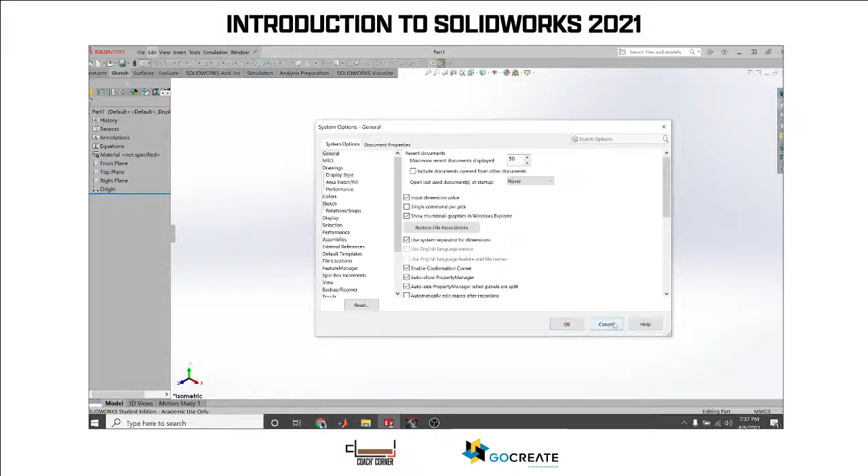Okay, so right off the bat, let's get acquainted with our layout. Yours might look a little different because I've got mine altered a little to use small icons and little bits of text - yours will probably use big icons. So if I go to Options, let's see, Display... yeah, I'm not going to mess with that. I'm not going to do any searching today.

All right, so right off the bat we have some things we need to become acquainted with. Along the top here, when you see the Features tab, Sketches, Surfaces - that is called the Command Manager. This whole area at the top is the Command Manager, and every time you switch from one thing to another, the options change. For example, on Features we still have our traditional Home, New, Open, Save, that kind of stuff, but in Features we have things like Extrudes, Revolve, Lofted and Extruded Cuts, Hole Wizards, things like that.

When we go to Sketch, we see we can create a new sketch, dimension the sketch, do lines, rectangles, slots, circles, arcs, and all kinds of stuff. If we go to Surfaces, the menu changes even more. So it's just important to be cognizant of what you're actually attempting to do, and relate what commands are in each one of these tabs.

The other thing is you can actually get rid of some of these tabs. Since we don't have any intention today of doing simulation, we can uncheck Simulation. We don't want to do any analysis either, so we'll right click on the tabs, go to Tabs, get rid of that. We can just kind of leave the rest alone - I like to leave Evaluate, and I like to leave SolidWorks Visualize because I typically go into that in other things.

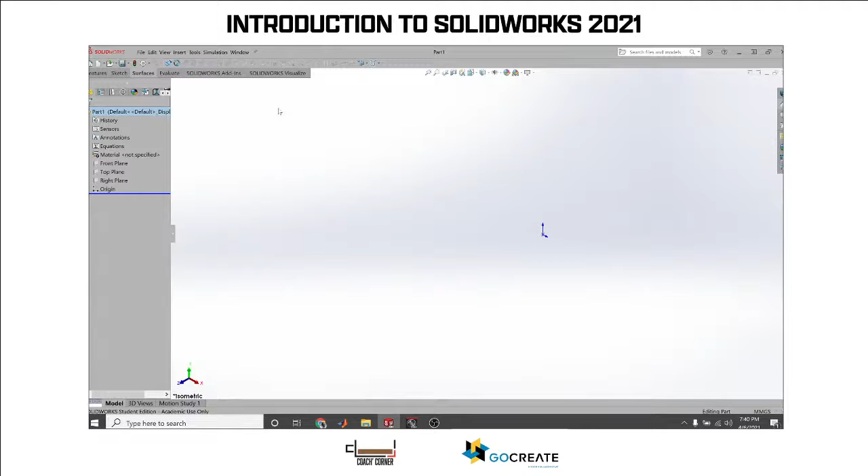And then on the left hand side, going down, we have this thing called a Feature Manager Design Tree. As I add features to this part, you'll see this blue bar will eventually move down and down, and I can start playing with some of the features. We have our Quick Access Toolbar, the Command Manager, the Features tab, the Evaluate tab - we'll go into that a little bit - and we'll talk about Sheet Metal later, plus breadcrumbs.

Okay, so let's go ahead and take this opportunity to jump off the figurative bridge and start with a sketch. The first thing I'm going to do is create a new sketch, and as soon as you hit New Sketch, you're automatically greeted with: hey, where do I need to do this sketch?

Where do we create such a sketch? It says right here: select a plane on which to create the sketch for the entity. With that command active, we can tell it we want it on the top plane, the right plane, or the front.

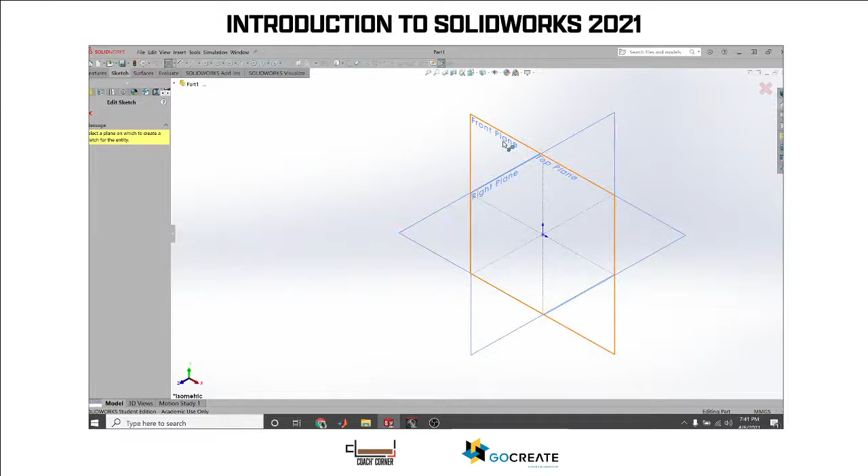If that's getting confusing, hold the center clicker wheel on your mouse and rotate around to manipulate the view. But for more concise control, you can expand this upper right hand corner, and you can see the front plane, the top plane, and the right plane. We can use that as our way to select, as well as just hovering over the plane.

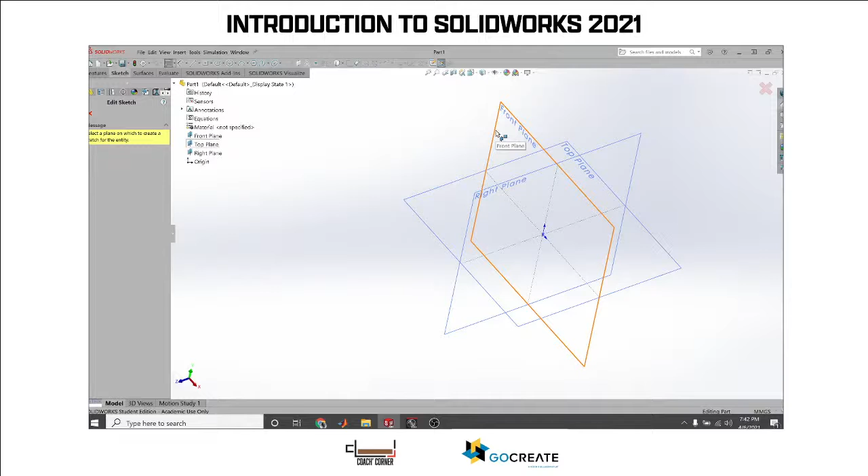So let's go ahead and pick the top plane. Now, this is basically the start of a sketch. There's nothing there, and we can start with primitive shapes and move forward.

If we hover over rectangle, we can draw a rectangle. Let's pick this origin point right here in the middle, click, drag out, and we can control some dimensions.

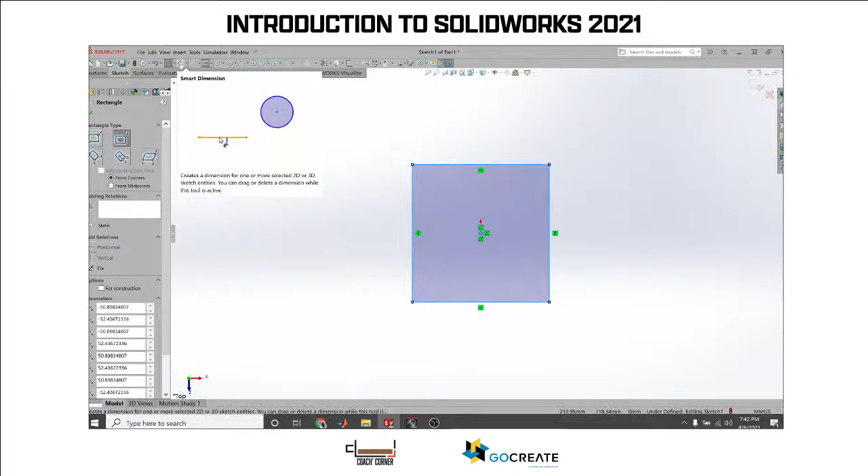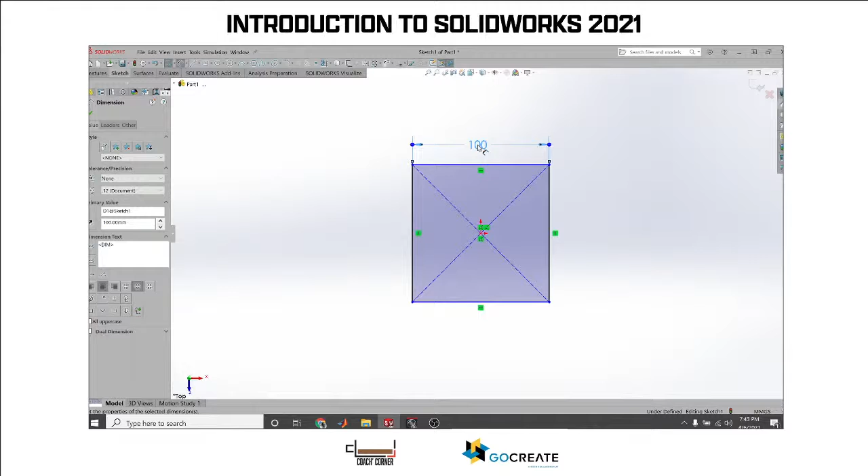If we want to do dimension, let's cancel that and grab our smart dimension tool. We'll click that, hover over this line until it turns orange, bring it up, and place the dimension by clicking again. Now it's highlighted this large number blue, so I can type in 100 and hit enter. That's 100 millimeters, because down here in the bottom right corner I've set it to millimeters.

Another fun thing we can do is click on this line, and we can do a couple things. We can hit 100, or we can type in something like 6, then put a space and IN for inches, and it automatically converts it to 152.4. Okay, let's go Control Z and undo that dimension.

The other way we can control this, if we wanted this to be a perfect square, is to add a constraint. We can click on this line, hold our shift key, and click on the second line. Now on the left hand side we have some properties: the selected entities of line 3 and 4, any existing relations, which there are none, and then we can add some of those relations or constraints here.

Obviously perpendicular is a constraint we can apply upon this. I don't think it's relevant right now, but because it's the most applicable thing, SolidWorks is going to automatically make it bold text. What I want to do is actually control how long that second line is based on the one I declared up above, the horizontal line.

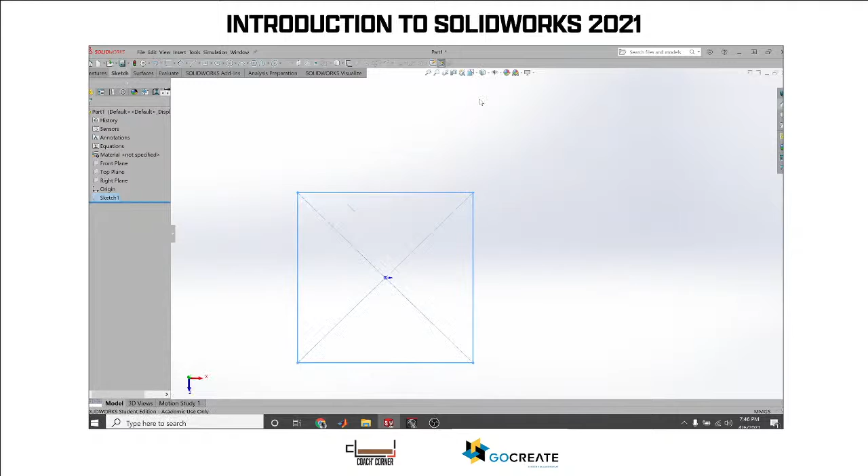Now let's play with our view orientation and the view heads up toolbar. We can click this drop down button, and you have a way to go to the front view, the left, or the right, selecting from any one of these as I highlight it. So I just click front. But what I'm going to do is go into this isometric view, or you can hold Control 7. Now we have this isometric view of our square.

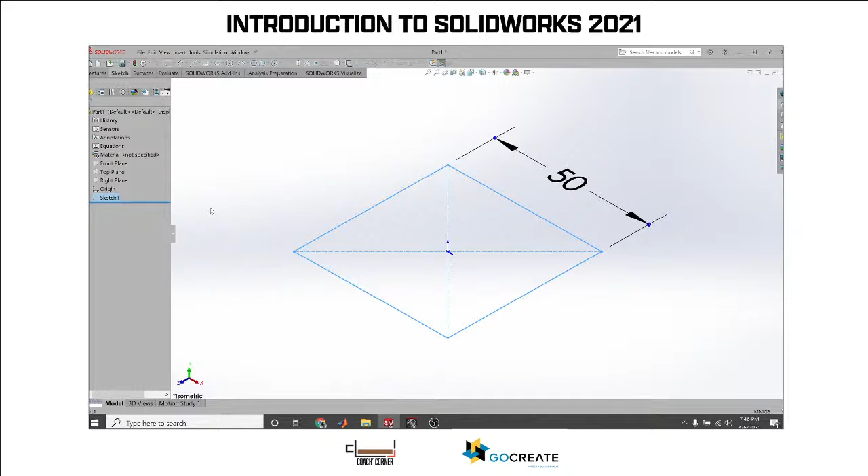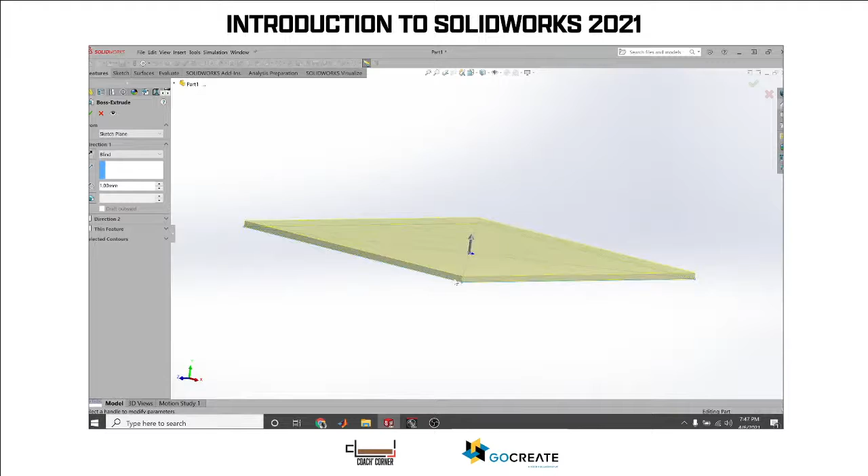With the sketch highlighted, we're going to go to features now, and we can do our first extruded boss. We'll click on this button, and you can see right off the bat that it's already added a little bit of thickness to this part for us. If we zoom in, you can see there's just this 1 millimeter thickness right off the bat.

But I don't necessarily want to do that. So there's a couple different things you can do here. You can drag and slide your extrusion if you want, or you can go the opposite way.

For now, I'm just going to come over to this highlighted area and type in 50 so I get a perfect cube. So we got our perfect cube there.

There are some instances when you're doing these extrusions, or making an extruded boss, where you might need to do a direction 2, like a second direction. When we get more advanced in our SolidWorks series and go further into detail, you'll see where this might apply.

But for now, I activated Direction 2. I've got blind selected, and I'll talk about that more in a second. I can say, hey, I want you to extrude upwards 50 millimeters, and then I want to extrude downwards, maybe 25 millimeters. It'll add 25 to the bottom of the part.

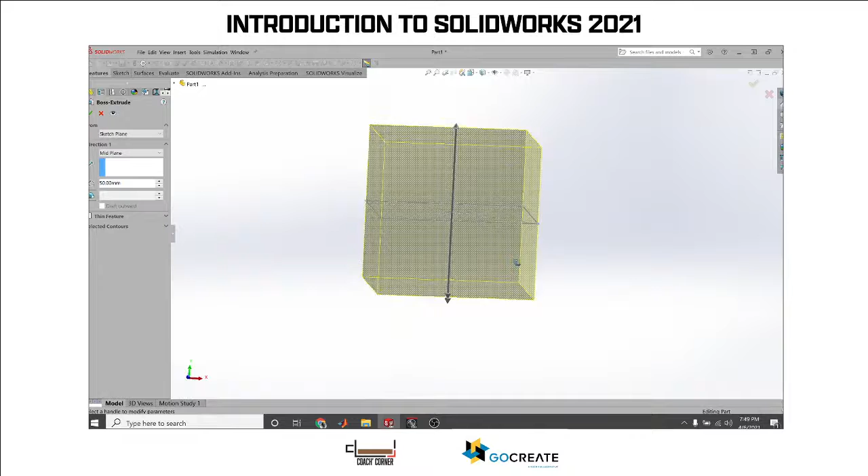For demonstration purposes, I'll go ahead and hit mid-plane, and it's going to take the 50 millimeters and divide that by 2, so it's 25 this way and 25 that way. And we still have our perfect cube. So let's switch back from mid to blind. It's back up top now.

You might run into a situation where you haven't declared the contour, for example. I'll just demonstrate now. I'll just hit extrude, grab this—see, it says sketch 1, contour 1. So sometimes you have to declare that. If we just clear selections, it's not wanting to do that for me. Yeah, that's what I want to extrude.

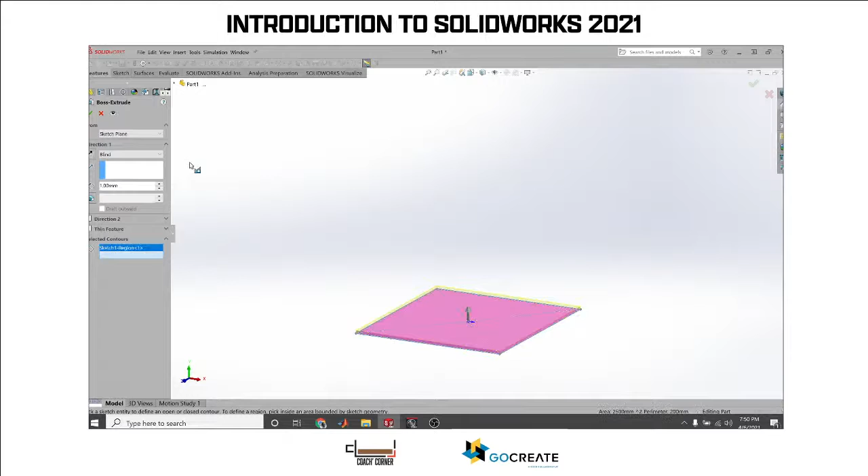Come back over here to 50 millimeters, hit OK. Then I can hit this check mark here and this green check mark here, and they both accomplish the same thing. So I'll go ahead and hit OK. And here we go, we have our first cube.

And nested within this boss extrude is the sketch that I used to create it, so there's a dependency here. This sketch, or I should say this feature, this boss extrude, is dependent upon this sketch.

Some people, especially ones that like to be super tidy with what they're doing, like to name the various features. So right now we have boss extrude 1, but we can come over here and name this feature cube. What is going on with my shift key? Cube. Okay, so you could do that.

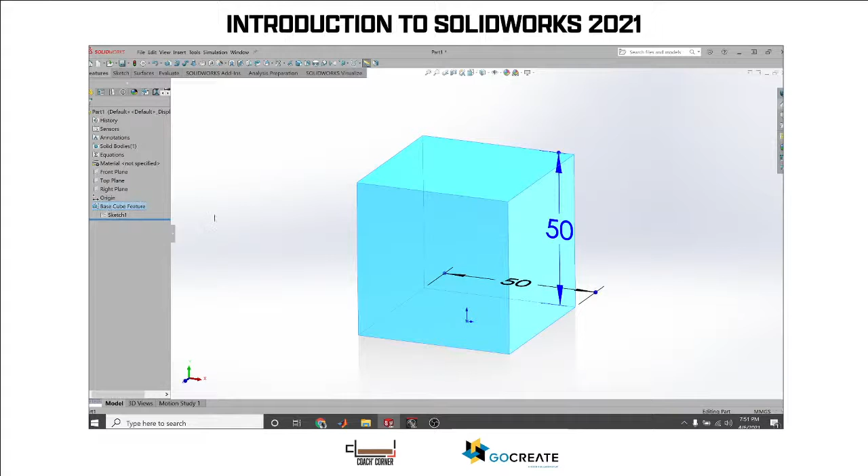Or you can be a little bit more descriptive and type base cube feature. Hit enter, and there we go. Let's turn off that instant 3D. Okay, and there's our sketch. All right, perfect. So let's just zoom and go Control-7 for the isometric view.

Now you'll notice I got this blue arrow sort of pointing around, and that's because our origins are showing, so we can get rid of some of this stuff. There we go. You can declutter your view, or you can clutter it up. You can add a bunch of stuff back in.

Let's see here, planes—we want to show height. There we go. So you just have that on nonstop all the time. But I don't really want to do that, so I'm going to turn that off in the heads-up display. Let's do Control-7, gets us back to isometric. We can play with our graphics.

If I turn off RealView Graphics, I can give some of that processing power back to the computer. Turn that back on, you'll get more of a realistic, shiny look, because it's tied to a material—I'll talk about that in a second. We turn on shadows, so now we can see the shadow being cast on the floor there. We can turn on ambient occlusion. We can turn on perspective, so now it gives us more of a realistic look at the cube.

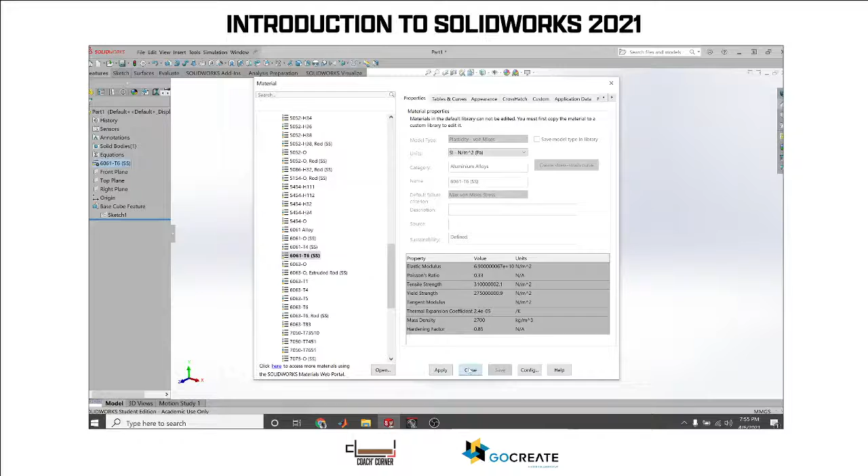So let's do ABS polycarbonate. Let's do a brass color. We can do copper. I'm going to go ahead and hit edit material, and I'm going to go to aluminum, and I want to specify 6061 T6. Hit apply, hit close, and again the view has changed.

Alright, so what then is the purpose of that? Why do we care other than, you know, like how it looks? I mean, looks are kind of important, if you're trying to get an idea for your part, like what it might look like.

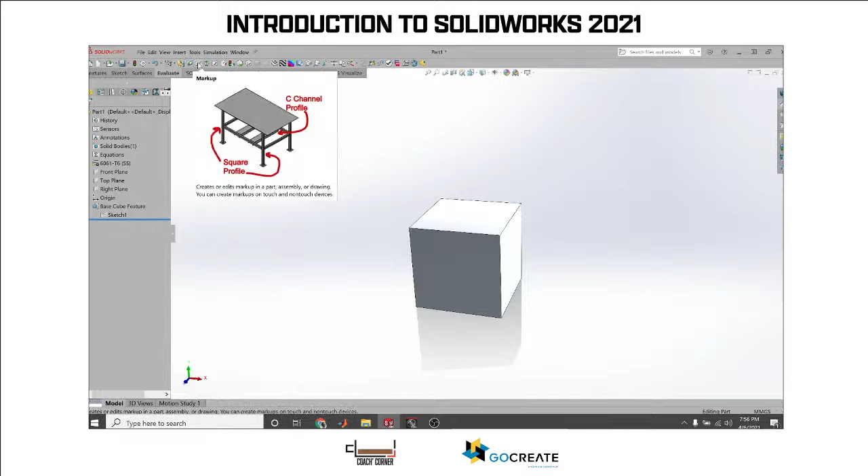But here's the thing: if this was a 50 millimeter by 50 millimeter by 50 millimeter cube of 6061 T6 aluminum, we could then estimate or come really close to how much this thing weighs by going to our evaluate tab. And in our evaluate tab, we have interference detection. We can do measure, markup, mass properties, sensor. We can do all kinds of things. So for now, I'll just show you a couple things.

This is our measuring tool, so we can come in and just verify, hold over this edge and it becomes orange. Click that, and there we go. Our distance, our total overall distance between this line and this line is 50 millimeters. So I'll drag that callout over there. And this line that we just selected there is 50 millimeters.

Expand this. You can see some callouts there. We're saying the distance is 50. The delta, or the change in X, is 50. The delta in Y is 0. The delta in Z is 0.

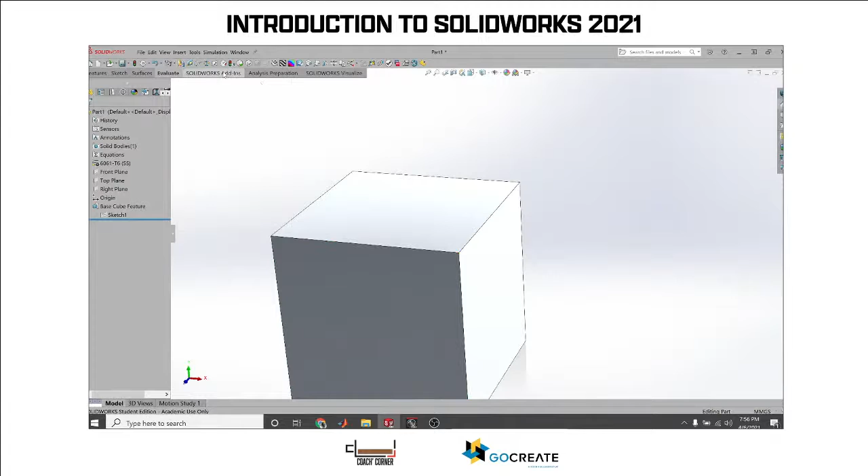Anywho, let's clear the selection. Let's close that out. How much does a 50 cubic millimeter of aluminum weigh? We can go to mass. And in this part here, we can see that our mass is going to be around 337.5 grams. But if you're like me and you're like, grams...

Or maybe you're into some other unit. So you can come over here and just say, I want my mass to be in milligrams. Maybe I want it to be in kilograms, or maybe I want it to be pounds. So I'm just going to hit okay. And you can see that it weighs just under 3/4 of a pound.

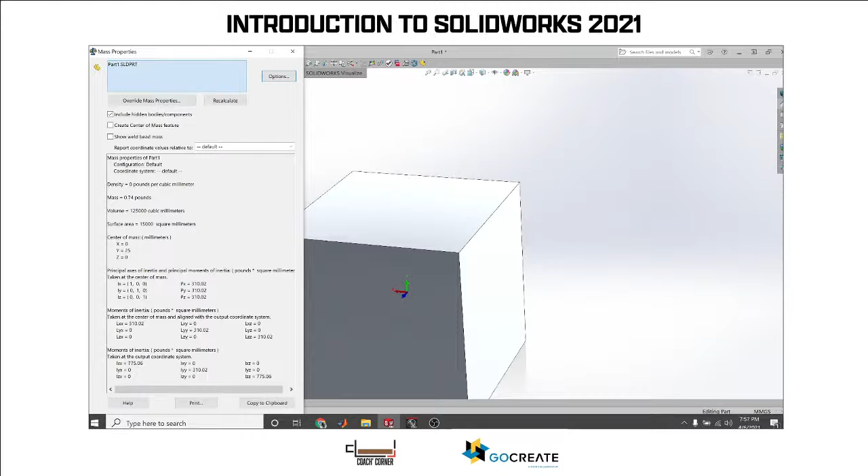So that's kind of the purpose of why you might want to declare your material a little bit more accurately, because then you can become a little bit more aware of how much that part weighs. If you're trying to do cost estimates, maybe you're going to call the yard and ask them, hey, I need this much aluminum. It's going to weigh 40 pounds. You can kind of come right off the bat and know how much that may or may not cost you.

When we talk about my other projects, the robots, it's really important to know how much things weigh. So just for funsies, let's go ahead and open up this robot.

Okay, I'm going to hit Control 7 to get this isometric view going on now. So you got to understand that this bottom plate and this second plate, they are made out of aluminum, and they're 1/2 inch thick. And then this top plate up here is also made out of aluminum. It's a 1/4 inch thick, and then all of these weird looking rails, those are all aluminum.

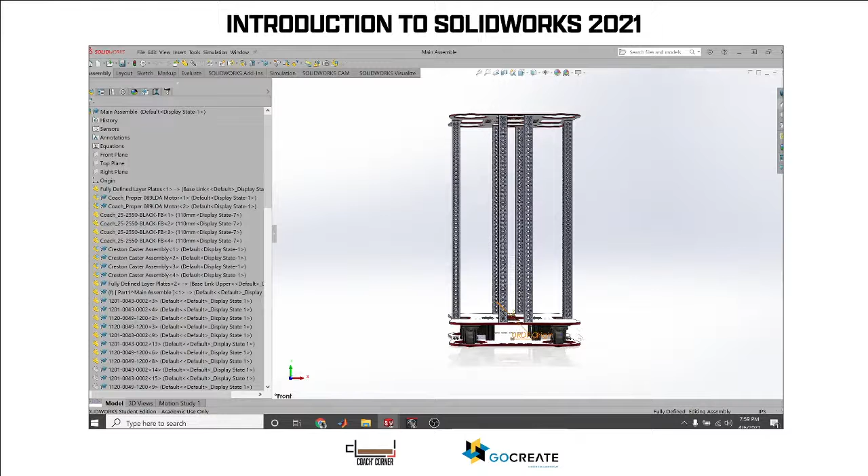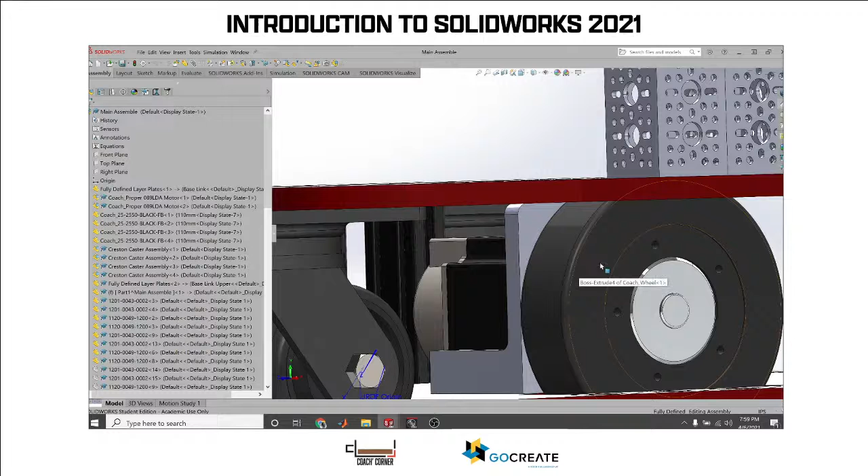I have aluminum here. I have some really heavy duty casters here. I have some motors and such down there. I have the motor mounts. And so by properly modeling all of these various parts and declaring their properties as close as I can, like right here I have rubber, but not all of this wheel is 100% rubber. I actually have some metal in there right on this ring.

So by being as close as I can, I come over to evaluate, and I can say, how much does this robot weigh? So go over to... it doesn't have a valid density.

So generally speaking, this robot's going to weigh 121 pounds. That's important stuff to know, because that drives how much weight I'm adding by adding battery packs and management systems and so on. How much do I need to worry about the inertia and all these other sciencey numbers that you'd need to know for doing roboticist work.

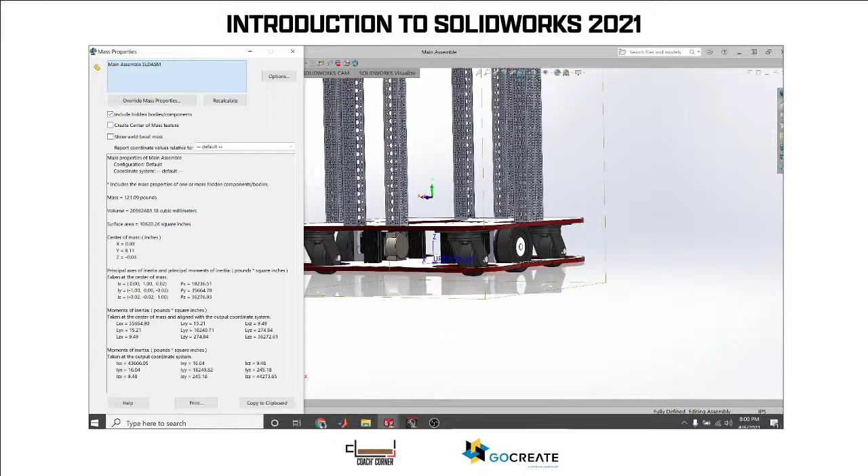You can also look at the center of mass. In the Y direction, it's around 8 inches from the floor. It's a little bit front heavy, and it's perfectly balanced on the X axis. So these are all things that are super important to people building robots.

Anyway, enough of that, I'm not going to bore you with building robots now. We covered sketches, we created a sketch, that's our sketch there. We did an extrude in our features commands, and there are all these other ones. So let's start playing with some more of these features.

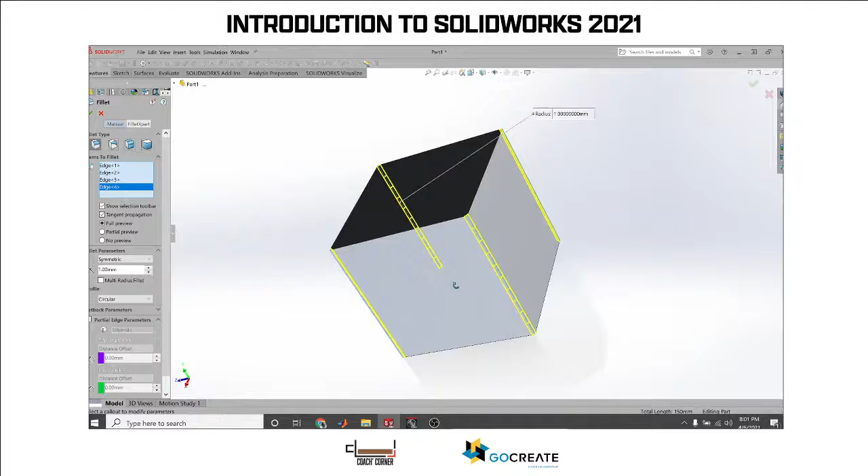For now, let's do fillet. Say we want to smooth out all of the corners or some of these edges here. We can click on the lines we want to fillet. I'm going to rotate over, and we can zoom in and see that it's going to create a 1 millimeter fillet.

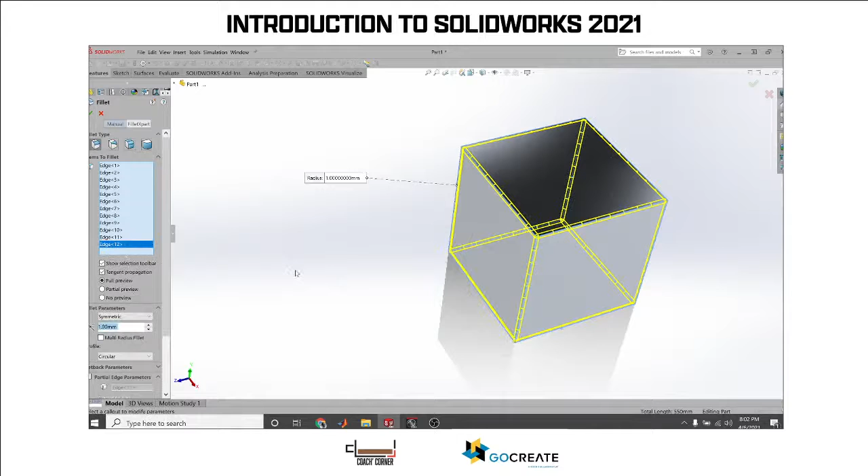Maybe we want this smooth on all the edges, so we're going to select. You'll notice when I hover over this corner that is unseen, it turns orange, so we can select that as well, and that one, and that one, and this one. Let's delete that, I don't want to select the face, I want to select an edge. And we'll hit OK.

Now we have really smooth edges. Maybe this could end up being a really weirdly shaped or sized dice. So, Control 7, we'll go back to our isometric view.

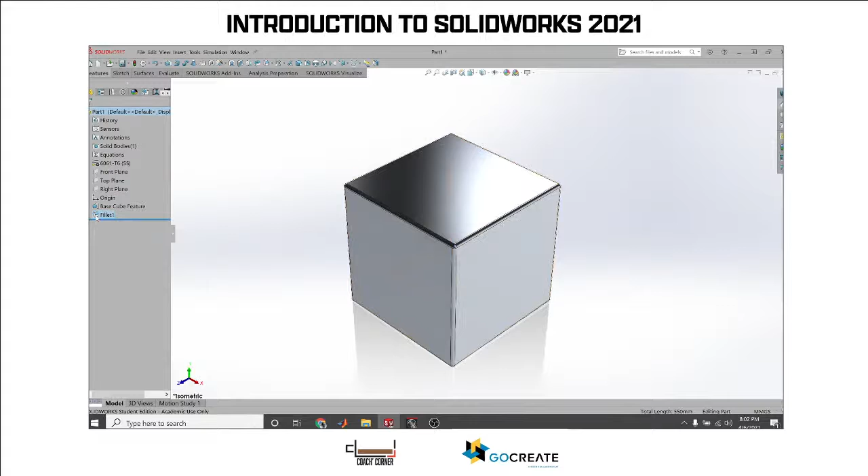I'm going to add another feature so we can play around with rolling back on the history, this feature thing. So let's do this. We have two features, a fillet and a base cube feature. Let's do another sketch, and we're going to create it on this face. Okay, notice how whenever I create the sketch, it automatically zooms to the face.

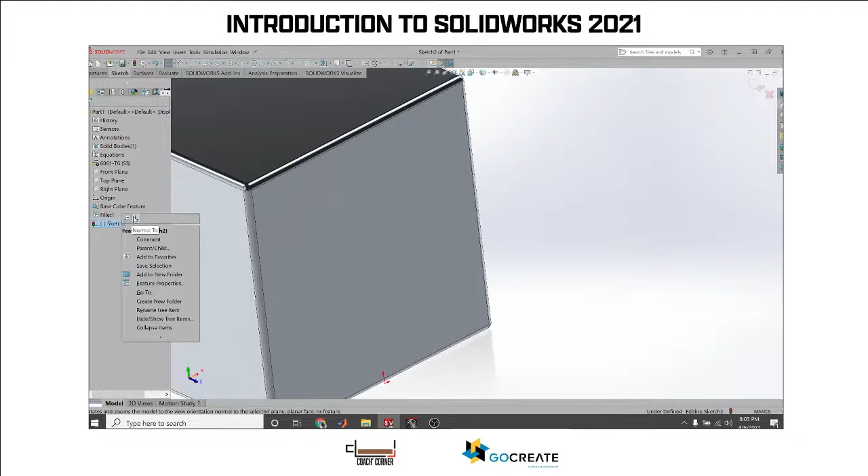You can mess with that by just twisting your camera and playing around. But if you wanted to get back to that, you can do something called getting normal to. So on this sketch, I'm going to right click, and there's this little arrow pointing up. I'll say normal to, and it gets me back facing the sketch correctly.

So what I want to do now is punch a hole through this square. But in order to do that, I really want to find out where the exact center of this square would be. So let's try using a center line. As I hover over this inference of the existing geometry, I get a little marker that pops up saying this is the center of this physical property. So I can click that. As I do that, these yellow lines pop up, and these are inference lines.

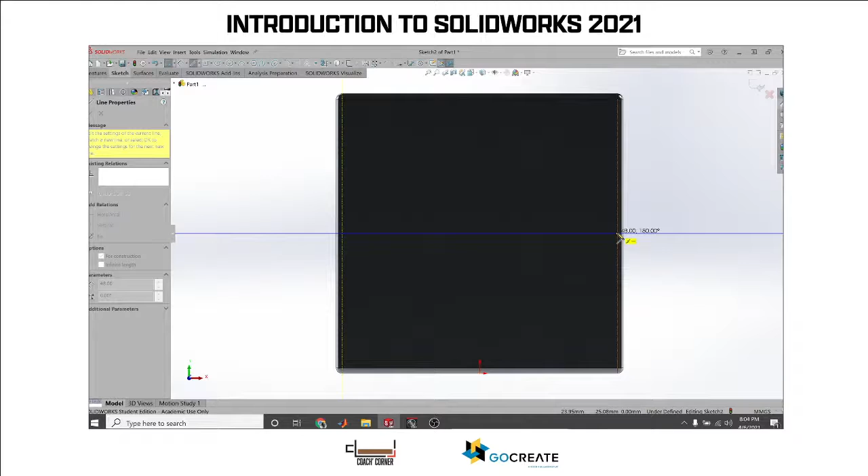These ones infer that it's straight up and down, or vertical. These ones infer that it is horizontal. So I'm going to hold it horizontal, let it snap all the way across, and hover until it hits this part of the fillet feature from the previous feature, then click, right click, and hit end chain.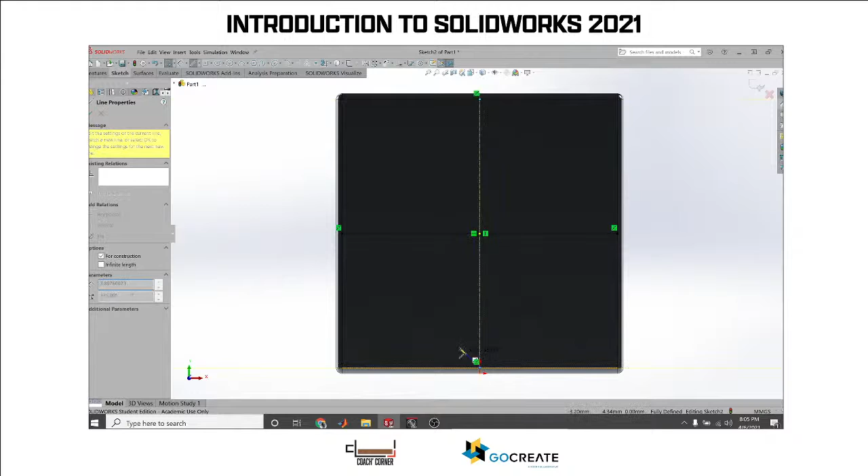I want to do that one more time, so I'm going to come over here, find the pop-up inference that this is center, and again we get our yellow inference lines, so we come all the way down and click, right click, end chain. So now I have these dashed lines that are going to help me place my hole.

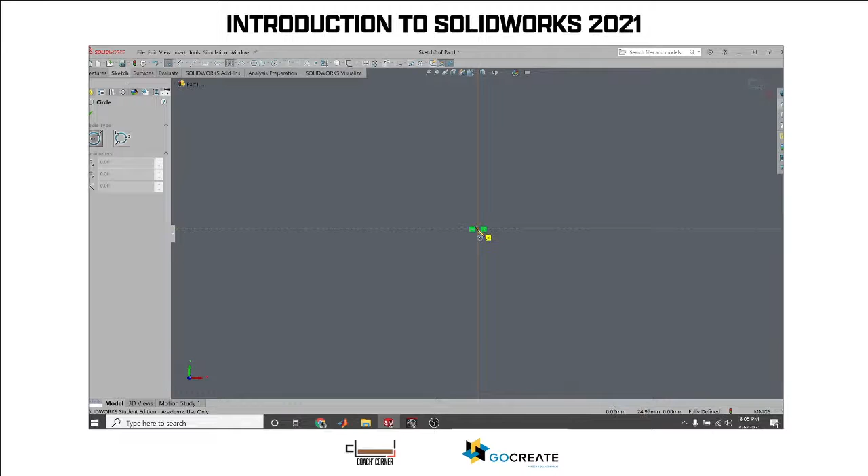So let's take a circle now, and let's place the center of the circle right here on this dot or point. We'll hit that. I'm not trying to put too many isms on you, but when I'm drawing circles or anything, I try to keep the inference, I don't like to just do some random 45 degree this way or that way.

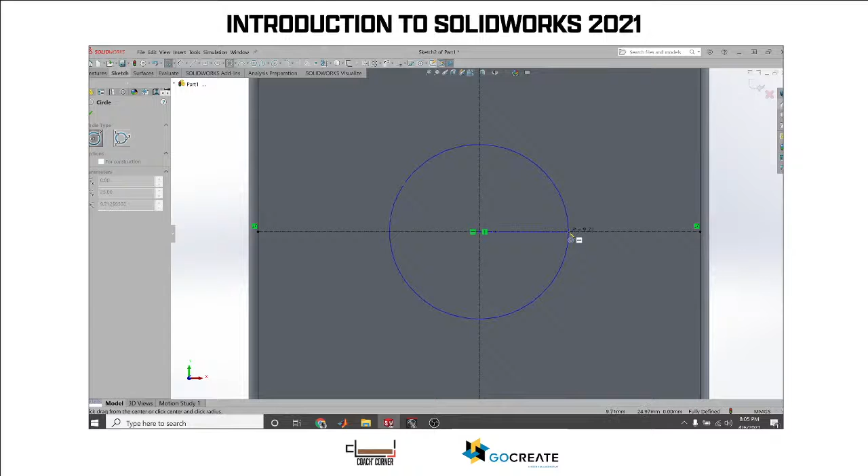I like to keep this drawn out and constrained to something, so I'm just going to hold it to vertical or horizontal. All right, so now we have the radius of our circle at 14 millimeters, and obviously radius is not quite diameter—it's half of that.

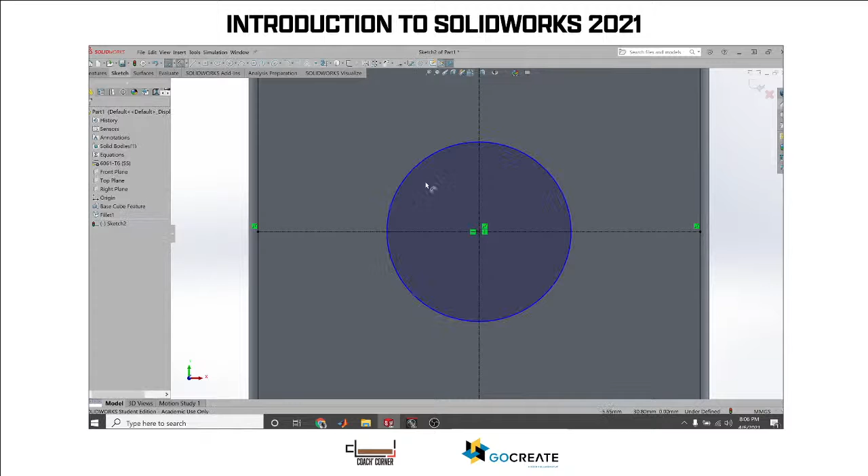So we can just type in 20... well, actually I want it to be 10. Okay, so then with that logic, if I hit OK and come over here to this circle, you can see now that I have a diameter of 20.

When you're placing your dimensions, I'm not trying to put too many isms on you, but I like to call it out in some kind of sensible way. Because this is such a small circle, doing this looks a little cramped, so doing this doesn't look as cramped. But I'm actually going to place it here for now because what I want to do is change it to 25 millimeters, and now it doesn't look as cramped. Alright, so let's go ahead and hit OK.

Awesome. Now, with the sketch still active, what I'm actually going to do is control 7. Let's go ahead and create another feature using this sketch by going to the Features command and then to this Extruded Cut.

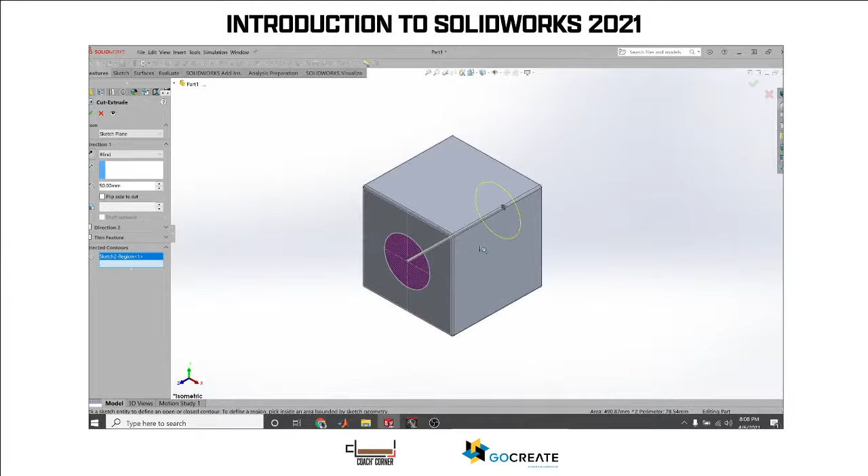And we have this selected here. So if we look at our selected contours, we can clear the selection and hover over it and click again. You can see it seems like it's automatically going 50 millimeters, or all the way to this face—but is that even correct? Because I'm just able to blindly drag this.

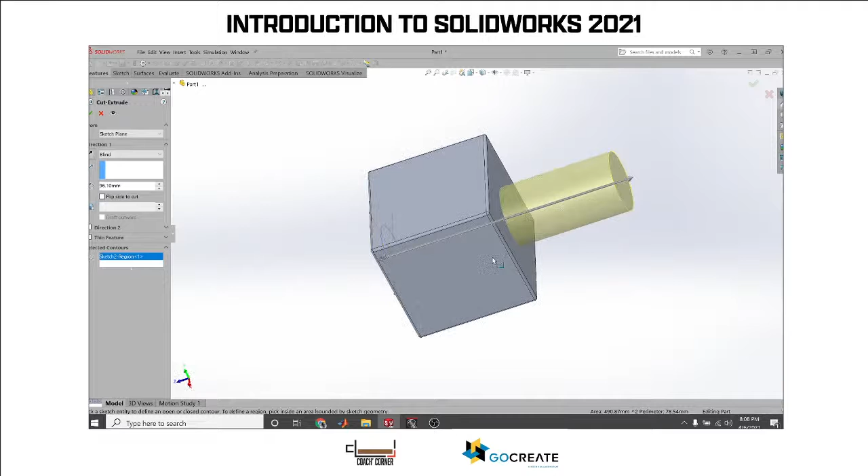So I can just say, well, I want it to be right about there, or I want it to be just somewhere way out here. And what this would do, I think, is create a hole here and then add material back here. So this is kind of not really super controlled.

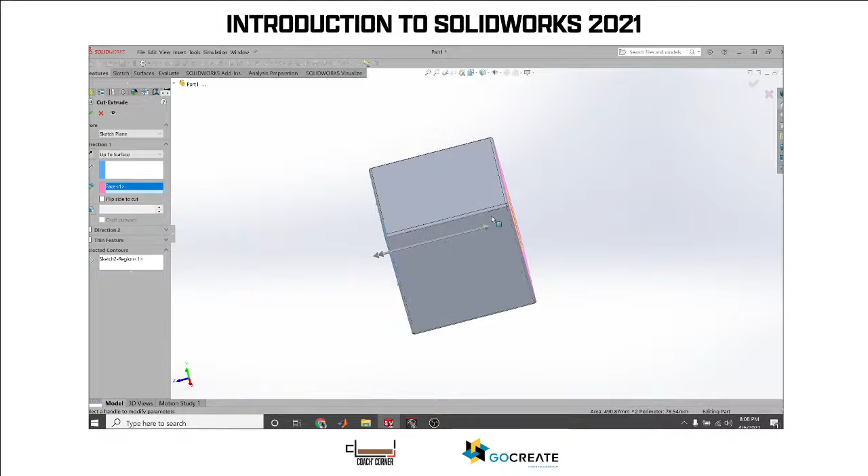So if we go back to this Direction 1 dropdown, we can tell it, hey, I actually want you to go up to this surface, and you'll see this new box asking which surface you want me to go to. So I'm going to click on this back surface, and it'll bring it all the way up to that face, and it will be controlled.

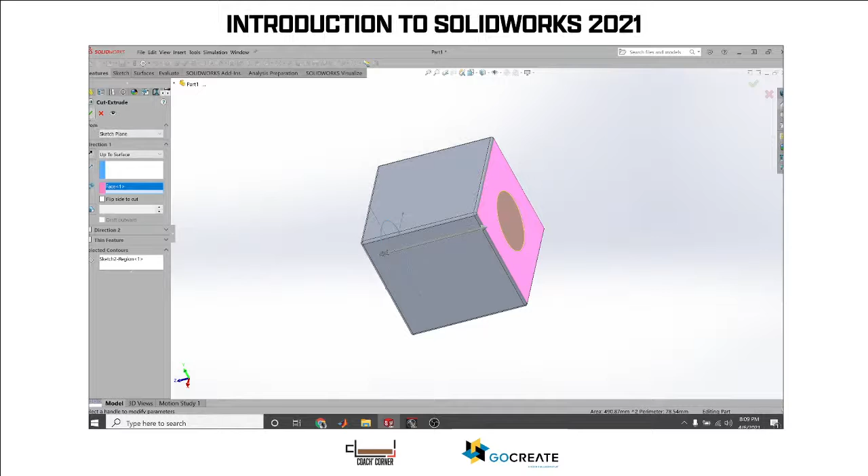So if I change the shape of the box, if the box got longer, then this hole feature would basically carry on—it would propagate to the new position of the face. So for now, I'm just going to click OK, and we have a hole.

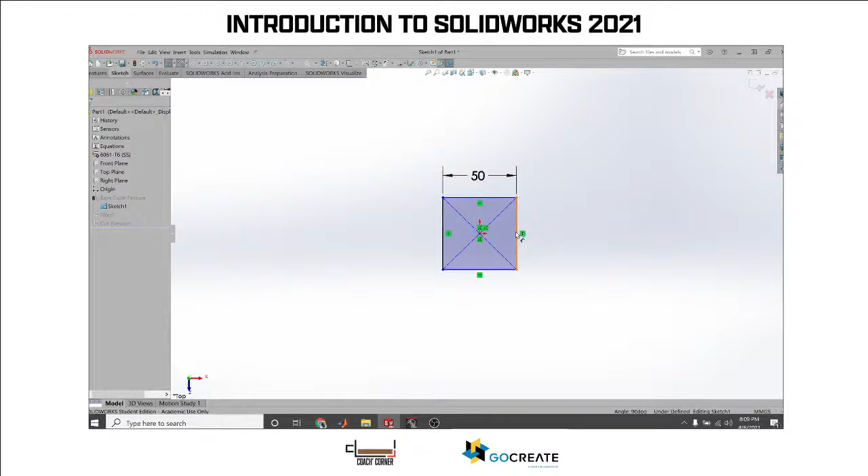All right, and so for funsies, let's go back to this base cube feature and edit the sketch. This time what I'm going to do is click this one and this one, get rid of this equal length, add a dimension to this one, and say 75. Hit OK.

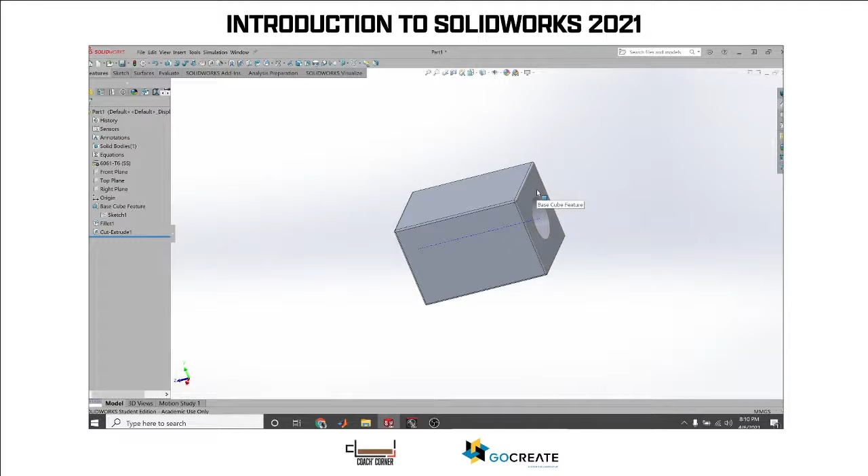Save our sketch, and then look—what's happened there is that because we defined that this extruded cut should begin here and end at this face, when this face moves, so does that particular portion of that feature.

Okay, so now if I want to play with my features, I was basically doing this because I wanted to get to this particular point where you can roll back using this blue bar. You can roll back your features. So I want to be like, well, I don't really want to have a hole there—so what does it look like without a hole? Cool. No, I want to put the hole back in.

So you can roll back your history, roll it forward, roll it back, and see what effect that might have. You can even go back and say, I don't want to fill it. I want to go—no, I want to fill it. Okay, and we can roll all the way forward.

Another thing we can do, instead of rolling back, is suppress a feature. So I've got this Cut-Extrude 1—I'm just going to change the name of this. I'm going to put 'hole.'

Okay, so let's do that. So I've got my hole called out.

Let's go ahead and suppress this. We can just right click on that, and there's this little arrow pointing down that goes from a solid blue to a clear see-through thing. We click that and it'll suppress that feature. But the feature's still there, it still exists, it's just suppressed. If we were to 3D print this, the feature's still there, but it would not actually 3D print that way. So we can go to unsuppress by right-clicking and hitting unsuppress.

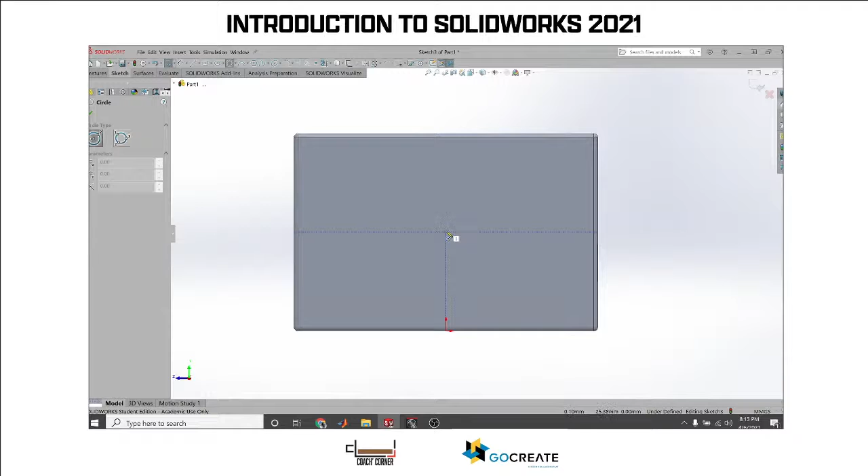To really drive this point home, I'm going to go to sketch and create a new sketch. I'm going to click on this face here, and for the sake of brevity, grab a center point circle and find the center point of this line, roughly right there. I'll come out and hit OK, and do a diameter of 25 divided by 2. Alright, hit OK.

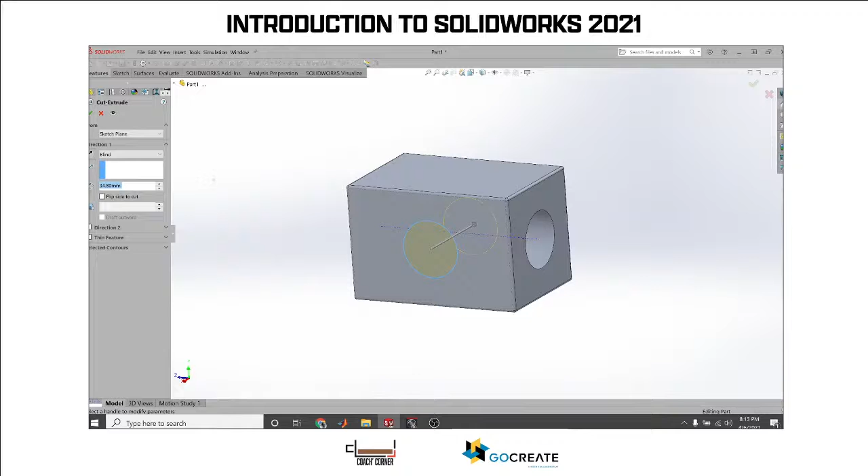And then I want to do a feature extruded cut. I'm going to say it's that cut, and be very specific and tell it to go to that surface. Hit OK. So now I've got this four-way block.

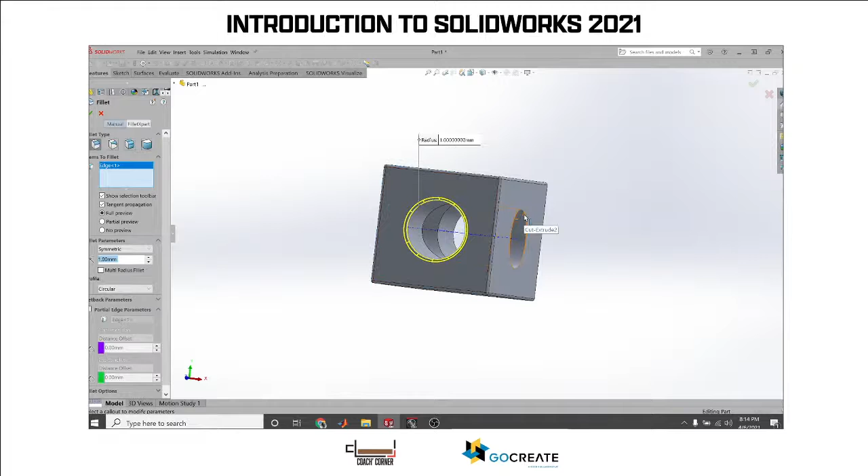Almost looks like a manifold for our go-kart. I'm going to make this a little bit more interesting and just add some fillets, so it's not that sharp edge there. Let's make it 1 millimeter and hit OK.

Cool, so I've got this part, but maybe on my go-kart this is like a chassis mount or something. Maybe not every single one needs to be with 4 holes, maybe they only need 2 holes. So here's what we can do.

We can go to this third tab in our feature manager design tree, our configurations manager. I can right click on this and say add a configuration. I'm going to call this 4 holes. I'm not going to get too crazy on this for now, I'll go ahead and add the check mark, so I have my default and my 4 holes.

I can come in here and say add another one, and say I want this one to have 2 holes. And then maybe I want to do another configuration with no fillets. I probably did not spell it right.

Now that we have some different configurations, let's go to the 2 holes configuration and do a suppress on this one. So if I go to 4 holes, there's 4. If I go to 2, there's 2.

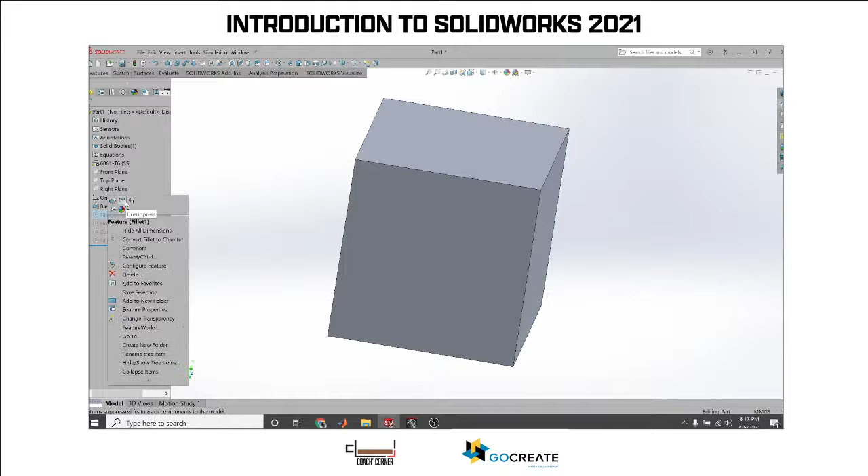Maybe in this no fillets version, I want to just say I don't want fillets, so I'm just going to suppress them, and there's no fillets. Maybe I want to get rid of these fillets too. Oh no, it's dependent on something, so we can't really do that. Another design oversight on my part.

As a matter of fact, I would probably try to move, or let's see, parent children, I think is the thing - parent child. Fillet 1 is a child of base cube feature.

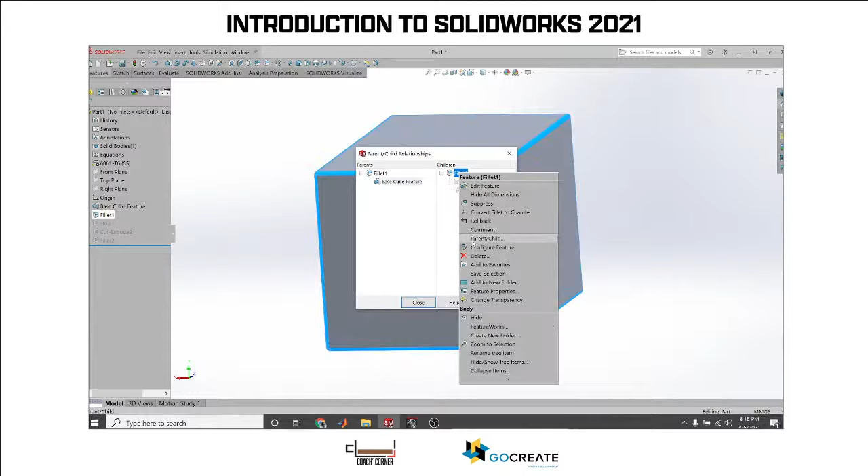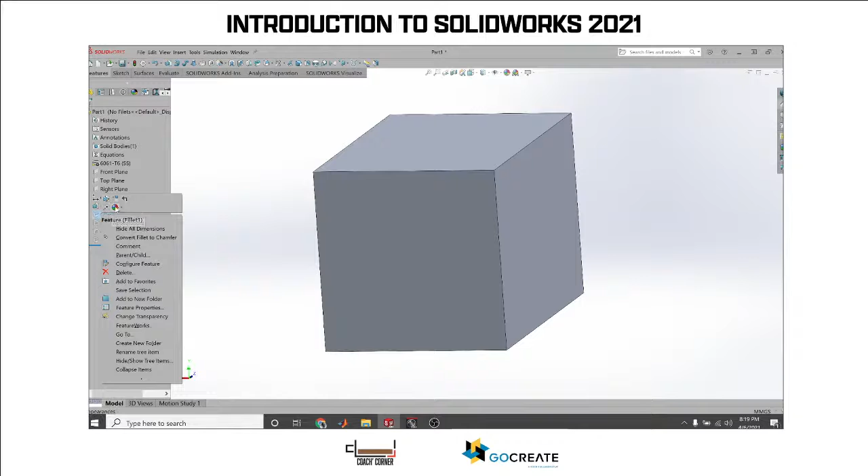No, I'm not going to do that. I'll get to that weird undoing of children and parent relationship in another video, perhaps. So let's go back and unsuppress the whole thing, unsuppress that one. Okay, cool. Awesome, all right.

So that's the basics of creating a part. I think I'll save assemblies for next week. Yeah, we'll do assemblies next week. So let's make sure I'm covering all the little things I wanted to cover today.

You'll see down here at the bottom, we're in editing part mode. That's in our status bar. We can tell the part is not saved because there's an asterisk up here in the title bar. If we were to save this, that asterisk would go away.

We can right click in the viewfinder and get access to various menus. We can edit our scenes, open drawings, use recent commands, the contour select tool. But if we right click on this, then that changes, right? Maybe I want to right click on that. I can create a sketch on this face, or edit this feature, or create a new one.

So edit sketch, create a new sketch. Maybe I want to change the appearance. Maybe I want to roll back from here, or add a fillet. I can even go normal to and get the view to go normal to that face.

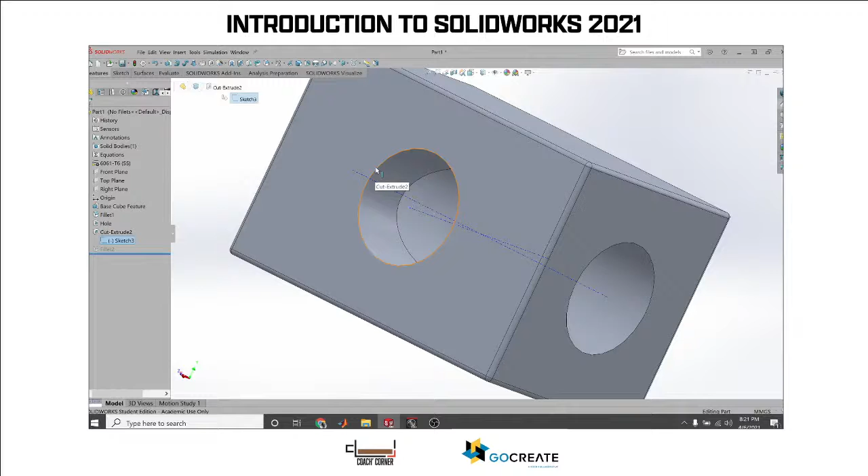We can do left mouse button selects, so we can select this whole thing here.

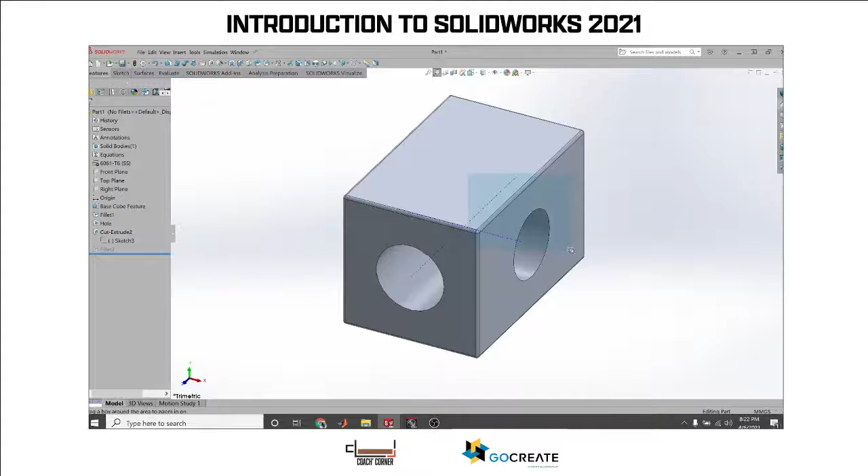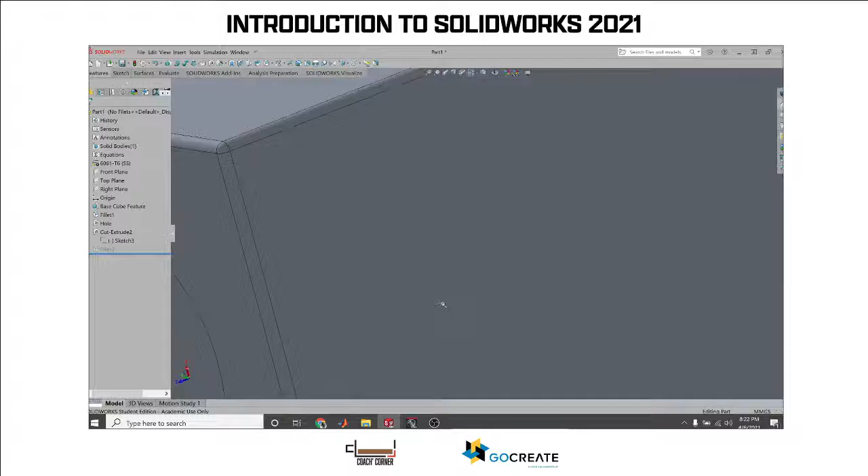Our shortcut button - if I right click and drag, I get a shortcut to all these different views. I can zoom in on that view. I can pan around and orbit by holding the middle mouse button, clicking and dragging. I can hold the shift key and middle mouse button, click and drag up and down, and it zooms in. I can hold the control key and click the center mouse wheel, and it moves the part around, pans it around.

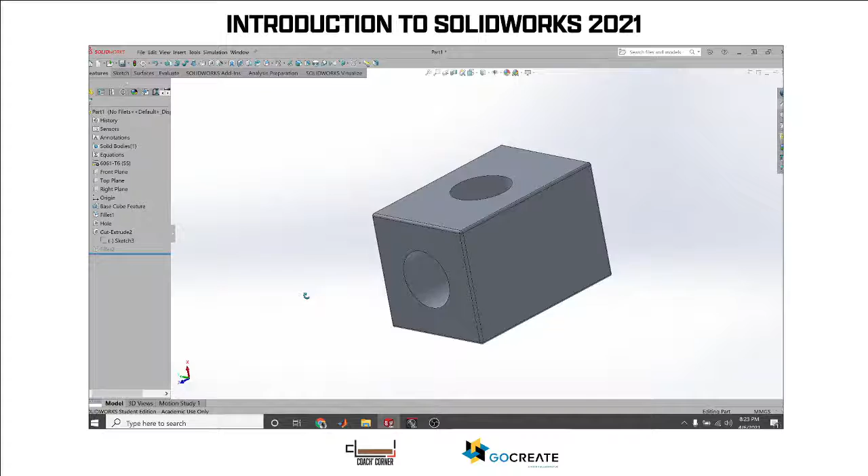Yeah, so I think that's not too bad for a very gentle introduction to SolidWorks. Go to the Go Create facility with this newfound knowledge and the very basic understanding of the user interface, and attempt to create some basic parts. Don't worry about creating a specific part. You're not going to model the engine of a Porsche today or tomorrow.

Let's see, how much time have I been on? I don't know. If you did manage to pick up SolidWorks in just this very short period of time - 1 hour, 18 minutes, and 27 seconds - enough to model an entire Porsche engine, my hat's off to you, and I'll buy you a Diet Coke from the vending machine the next time I go through. But anyway, go to Go Create and open SolidWorks and just create a few parts and play around with some of the features and the sketching stuff.

Don't worry about surfaces right now, we will get into surfaces. They are a little bit harder to do. And then next week we will attempt to create an assembly, and we'll talk a little bit more about relations and fully defined sketches and all that kind of stuff.